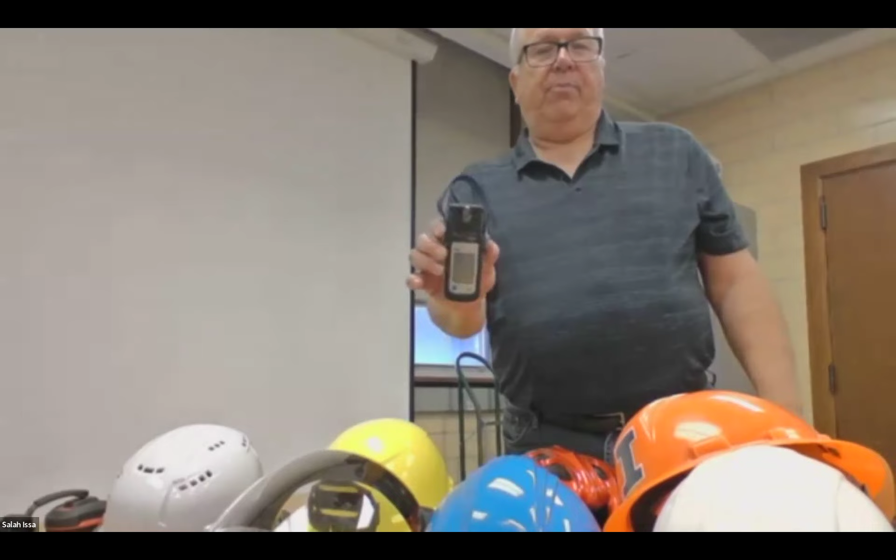Another thing that we would do as we're working in the world is we all carry devices with us. If I was in a situation or an environment where I had an oxygen issue or I need to monitor my conditions around me, I can carry a monitor. This is a replica 4-gas monitor. In certain situations in the ag world, you may actually have monitors specific to a product.

Like in the grain industry, if they've fumigated a bin or something and they've used phosphine or whatever, they would have a monitor specific to that product. Most fire departments and John Q. Public don't have that. It would be specific to the facility usually, but this monitors air, carbon monoxide, and lower levels, our LELs, for explosive. So once again, a simple, easy device.

Before they're used, you have to bump test them, which is basically you turn it on and let it cycle in clean air, and it does a self-test of all its monitoring, so that you have a working monitor for where you're at. Once again, critical to our safety.

If you were in a confined space situation, at least in the rescue world that I come from, there would be a monitor at the opening where you're going into the space. There would then be a second monitor on the rescuers themselves or the employees, monitoring where they're doing the work. And in my world, we record the readings on those monitors every 15 minutes, from the start of the entry to the end of the entry.

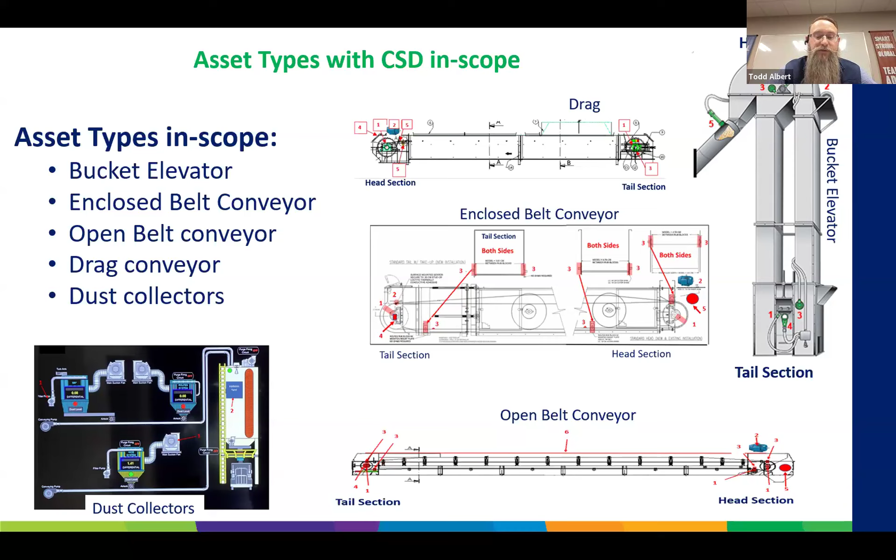Our goal is to highlight how consistent monitoring, inspection, and testing of these systems will help maintain safe, compliant, and efficient operations. Next slide, please.

All right, so bucket elevators. When it comes to bucket elevators, focus should extend beyond the belt itself. It's also essential to monitor all major pulleys, including the head, the boot, and if your bucket elevator does have one, a knee pulley. So to achieve coverage on these, install alignment sensors and bearing sensors at each of these locations.

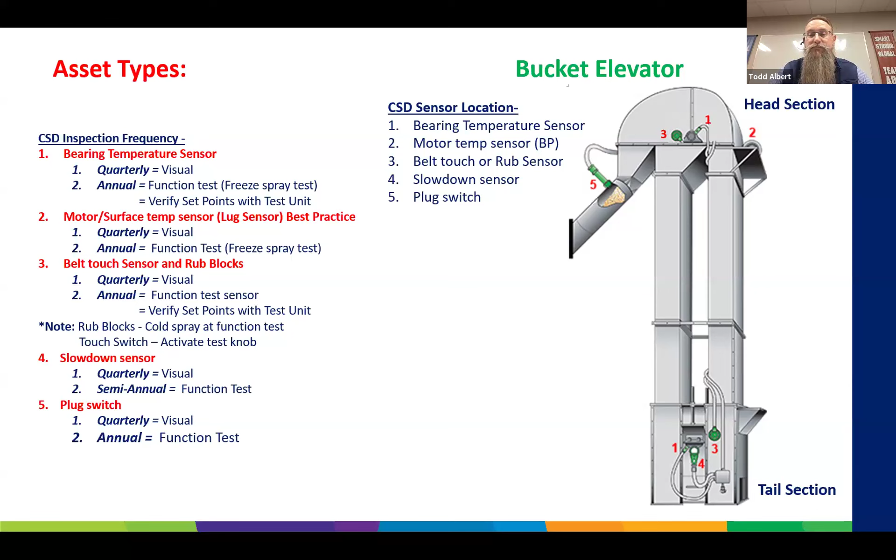And I will add this as well. If you have an alarm on one of your CSDs or your critical safety devices, make sure you go investigate why you had the alarm. Don't just immediately restart the equipment and try to keep restarting. Maintaining this inspection and testing routine helps ensure bucket elevators operate safely and efficiently throughout the year. Next slide, please.

Todd, I'm just going to ask a question here quick since we're there. Somebody asked about explosion sensors for bucket elevators. Just wanted to go back to that point. They're jumping ahead. Oh, yeah, okay. We'll get to that in a little bit. Yeah, we'll talk about explosions, suppression, and venting here in a second. So, yes, a good question.

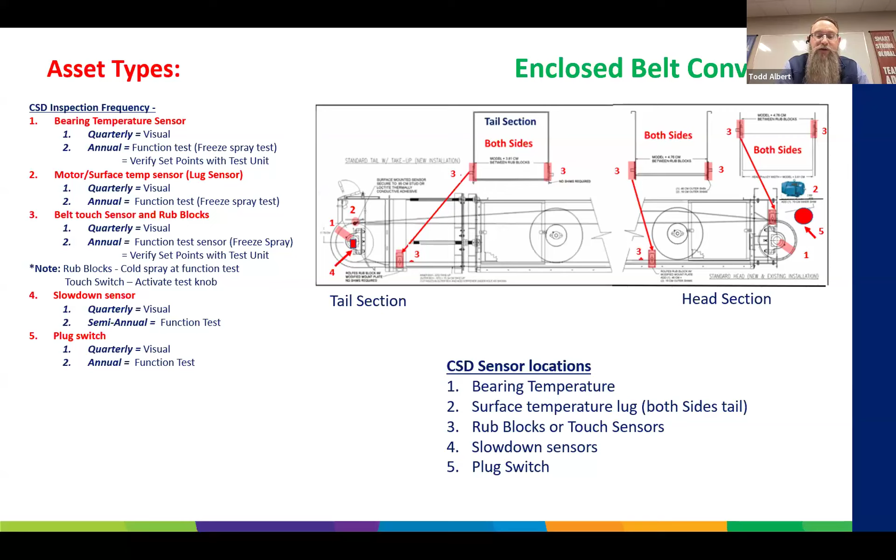Enclosed belt conveyors also utilize a similar sensor setup to that of bucket elevators, but in addition to your speed, your bearings, and your alignment sensors, it's also good to include lug sensors at the tail. Because a rub block or a touch switch alignment sensor can't be installed directly at the tail, they can be positioned farther up on the casing to pick up the belt. Since these alignment sensors can't cover the tail pulley, lug sensors can be added at the tail to detect any pulley movement or misalignment, providing an additional layer of protection and early warning capability. This diagram and this configuration allow for effective hazard monitoring. Next slide, please.

So open belt conveyors: in addition to all the sensors that we just talked about on enclosed belts, it's also important to install pull cords along the conveyor belt. The pull cord setup ensures that personnel have immediate access to an emergency stop from either side of the conveyor, enhancing overall safety and compliance with best practices for conveyor hazard monitoring. Next.

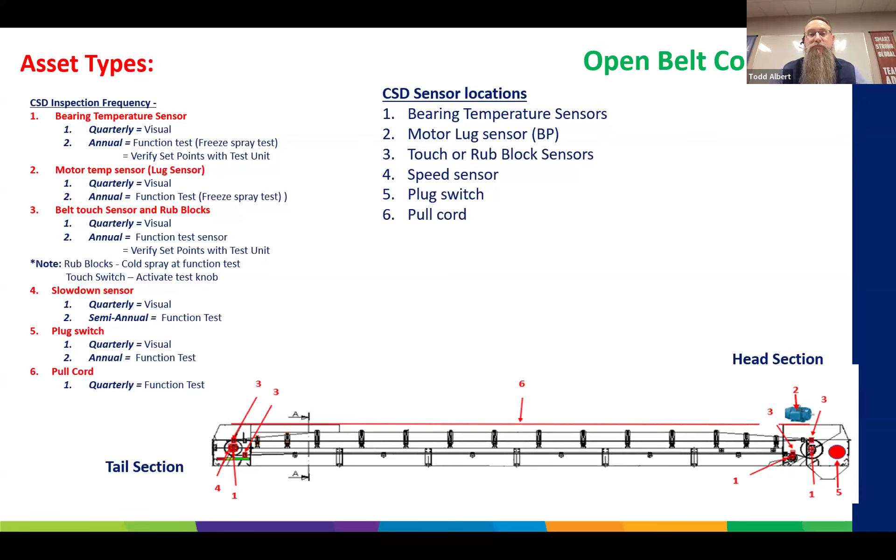Drag conveyors: I would say the most important sensor on here is a slack chain switch. If you cannot install a slack chain switch due to design, a speed sensor or a lid switch can also effectively work in this system.

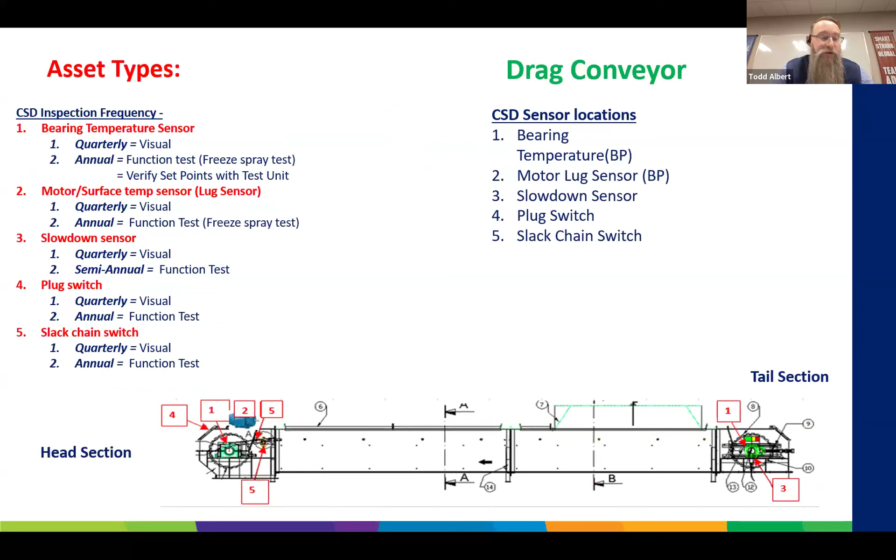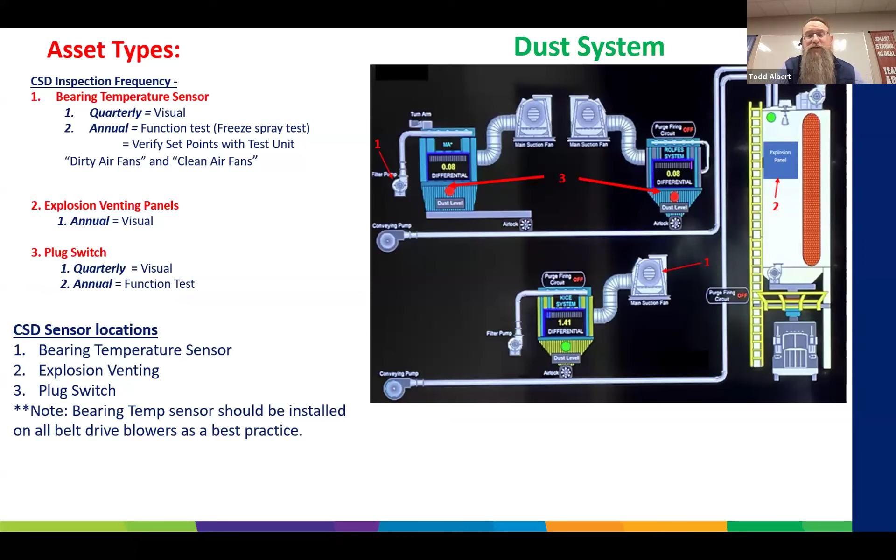Next slide, please. All right, dust systems. The CSDs we're looking at there are bearing sensors on the fans, plug sensors, and explosion venting or suppression. If you have a dirty air fan, which is the fan before the dust filter, I would recommend you have bearing sensors on that fan. If you have a clean air fan, I would say having bearing sensors on the fan bearings is more of a best practice. All right, next.

Okay, so let's turn our attention to the sensors themselves. If you're unfamiliar with the various types of sensors used in the monitoring systems, I've outlined them below for reference. And they did bring up the question about explosion suppression and venting. I did take that out of here, I'm sorry. We can talk offline about that if you want. But I'll go through these.

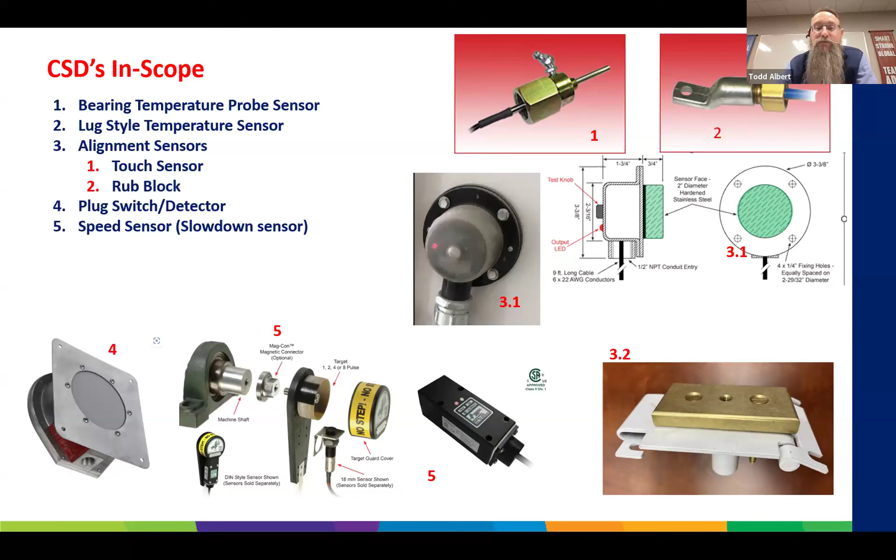The first picture we have is a bearing temperature probe style sensor. Number 2 is a lug style temperature sensor. 3, we have different types of alignment sensors. 3.1 is a touch switch or a touch sensor. And then 3.2 is a brass rub block. 4 is a plug sensor, and that one in the picture is a diaphragm style plug sensor. And then 5, we have a speed sensor or a slow down sensor. Next slide.

All right, bearing temperature sensors. They're designed to detect or monitor heat within the bearing. In the bottom left picture, you'll see what I call a button style bearing temperature sensor. Technology has since resulted in additional options. For example, on the far right, you have an adjustable depth probe sensor. I believe that receives a faster reaction time on temperature increase. It's closer to the bearing race.

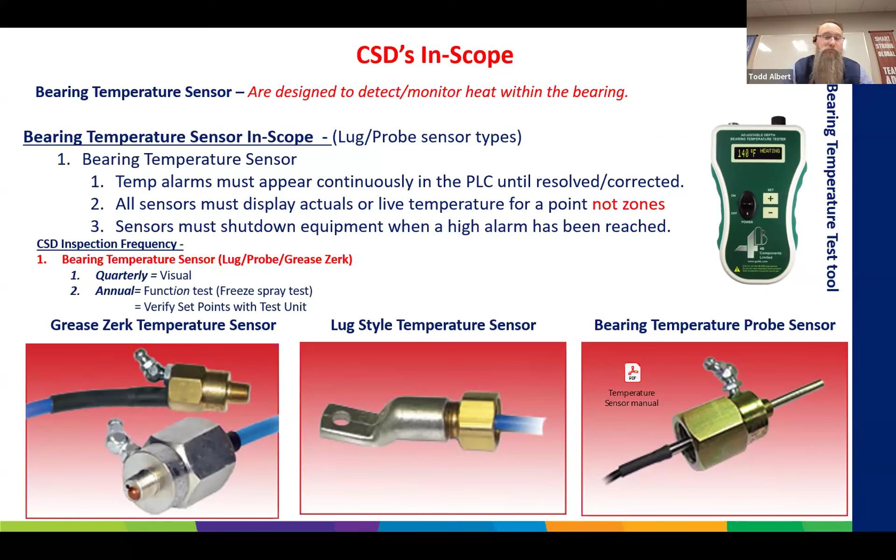And then in the middle, you have a lug style temperature sensor. This is an older picture of a lug sensor, but some newer ones have adjustable depth probes that actually go in that lug sensor, and I feel that's a great advancement in this. All right, next slide.

So, quarterly visual inspection of bearing temperature and lug sensors. Are bearing temperature sensors properly mounted to a bearing or surface? Are the temperature sensors easily accessed for periodic inspection? I can't say this enough. If you have, let's say, a tail of a high roller, or a head of a bucket elevator that's way out in the middle of nowhere, and you have to get out there using a harness, it's not safe. Let's get some type of platform or scaffolding so we keep our people safe out there.

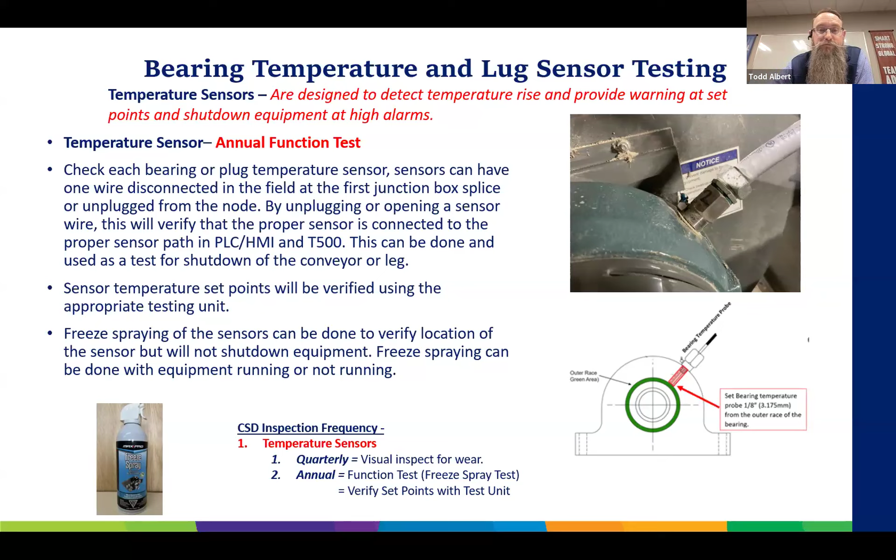Next picture, please. All right, click it one more time. There you go.

So I'm going to show you a couple pictures of acceptable and unacceptable. On the right, you see acceptable. If you stare at a picture long enough, we might find something wrong. But the way that bearing sensor is installed looks secure. From the picture, it looks like seal tight's good. Looks like everything's fitted in there good. Looks nice.

Unacceptable. On that top picture on the left, fitting not secure on the grease. So if you look at that, that's where I talked about if you didn't tighten down that fitting on the bearing sensor, you could get grease sent back up through your seal tight into either your field connection boxes or junction boxes, makes a mess. So you don't want that. Make sure it's tight.

And then on the bottom, unacceptable picture, seal tight not connected. So you could get water into the seal tight, water into that bearing housing. You can get dust in there, and that's all stuff you don't want in your bearing. And then also we potentially could have that probe not set at the correct depth. So stuff to look for on your visual inspections as well.

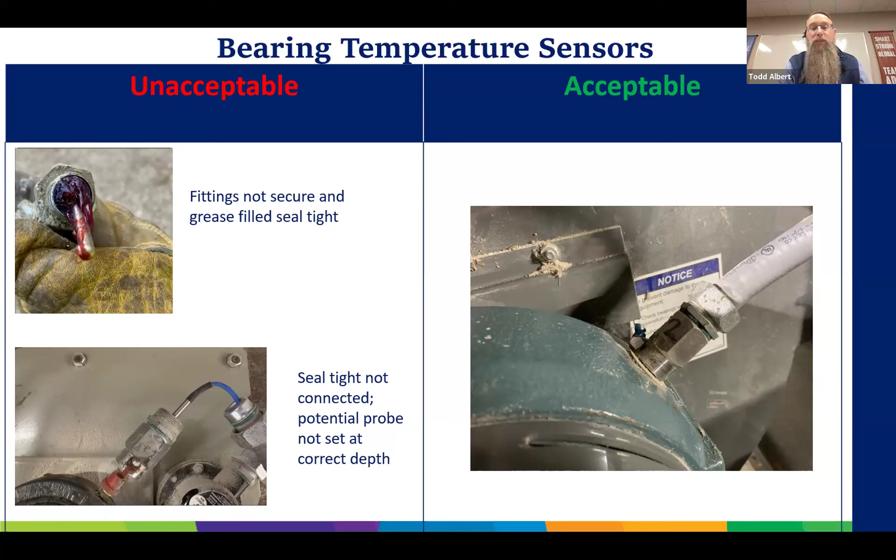All right, next slide, please. All right, getting into alignment sensors, touch sensors. Touch sensors are designed to detect misalignment of the belt or pulley, which activates a shutdown after 15 seconds of continuous contact. Quarterly inspection on this. Are alignment sensors properly mounted to pick up belt and pulley shift? Are they easily accessed? Do they show signs of wear or frequent contact with the belt?

So I'm going to ask, when you do inspections of these touch sensors, that you do lock out that piece of equipment. Just like Dave said earlier today, lock that out. I don't feel it's safe that you keep that piece of equipment running or have product on it and you pull an alignment sensor out to inspect it. There's potential for someone to get hurt or get injured. We don't want that. So make sure everything's locked out.

The alignment sensor shows signs of wear or frequent contact. So this touch sensor, I don't know if you can see it here. This one has a little bit of a groove on it right there. That's got a groove on there. I would look at replacing this. Well, this one, it's also missing the knob on the back. Yeah, if you see that on a touch sensor, I'd replace that.

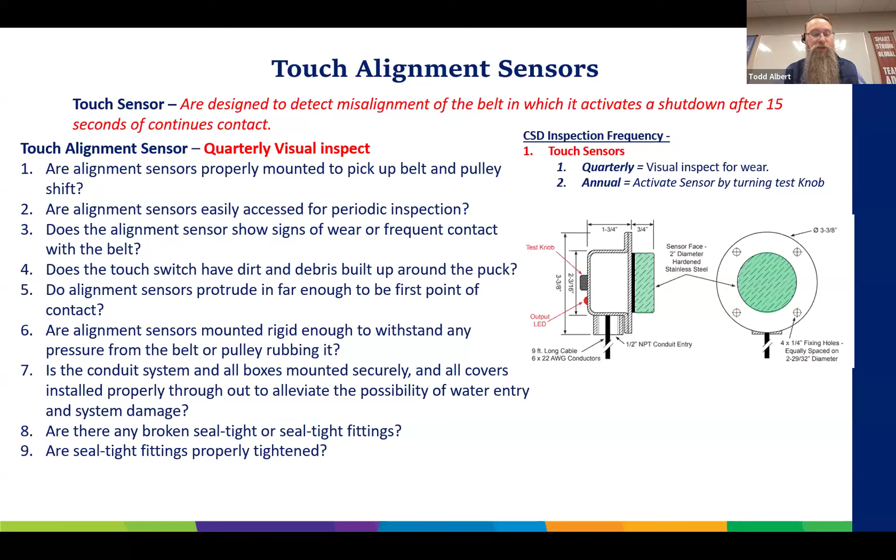We want to make sure that's first point of contact, and I'll talk about that in a minute. We want to make sure it's rigid enough to withstand pressure from that belt or pulley coming over. We want to make sure all that conduit and all covers are sealed up, making sure we don't get water in the system again. And again, seal tight fittings, making sure they're properly tightened and nothing's broken on there. Next slide, please.

All right, testing the touch sensor. Easy way to test this. Again, the knob is missing on this. It's hard to see. There should be a knob there, and there is a little red light. Of course, this one's not hooked up anymore. So to test this, you would not have product on your equipment, but you'd have that piece of equipment running. You'll see that little red light on there.

You would turn that knob until you see the red light go off. Once that red light goes off, it initiates your alarm or your shutdown. And once that's done, you can turn that knob until you see that little red light turn back on, and then you're good to go. You can move on to the next sensor. Next slide, please.

All right, so again, we got some acceptable pictures and unacceptable. Here in this picture, you can see on the acceptable side a touch sensor that looks to be acceptable. One thing to keep in mind is the length of the self-tapping screws that are in there. They need to be shorter than the puck. And here is an unacceptable. If you look on that unacceptable side on the right of the picture, there are 5 shims in that puck and loosened bolts on that.

Rule of thumb is if you have more than 3 shims on your touch sensor sticking it out, you are most likely not the first point of contact. When I say the first point of contact, I mean if the belt or pulley misaligns, will that sensor be the first thing that belt or pulley touches? You don't want the belt or pulley to touch anything else first.

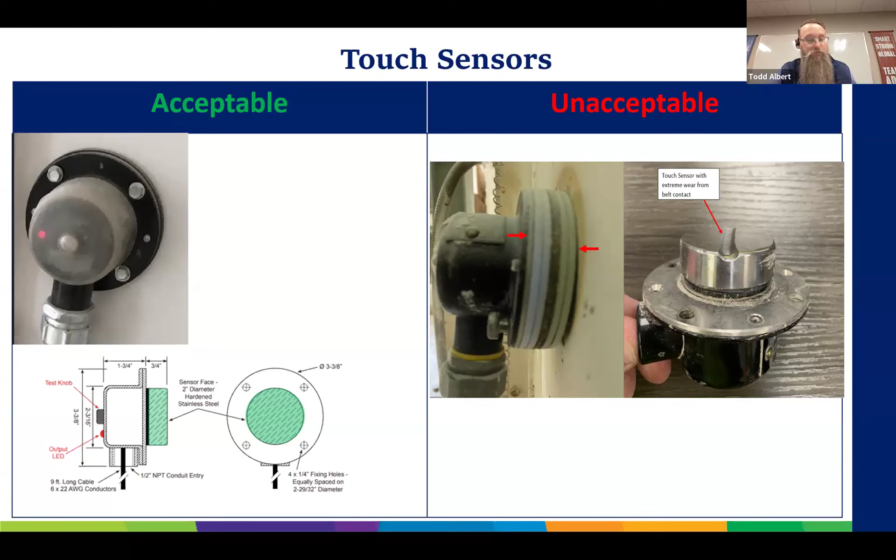All right, rub blocks. Rub blocks are designed to detect misalignment from the belt or pulley by temperature. So quarterly visual inspection: are alignment sensors, your rub blocks, mounted properly to pick up belt and pulley shift? Are alignment sensors easily accessed? Again, we don't want to have somebody climbing out on something and making them unsafe. We want an actual structure or a platform they can work off of.

Do the alignment sensors show signs of wear from frequent contact with the belt? Again, just like Dave said earlier today, lock that piece of equipment out before you start pulling these rub blocks out and looking at them. We don't want you to have a potential to be injured with that.

So when you look at that, if you see wear, you can see this rub block has been rotated once you've had a little bit of a wear mark here. Once they've had either the alarm or they did a quarterly visual inspection, they rotated it and used the other side, and then this side has a very deep groove. Once it's got that deep of a groove, replace the rub block.

Some rub blocks, you can flip them, but I would recommend you not to flip them, because if you have that big of a groove back there and you flipped it, you could get dirt and debris built up behind there. And if you did have a hard belt or pulley rub, then you could potentially have grain dust behind there. And then that grain dust could be your first smolder point there. And we don't want that. So rotate them, but do not flip them.

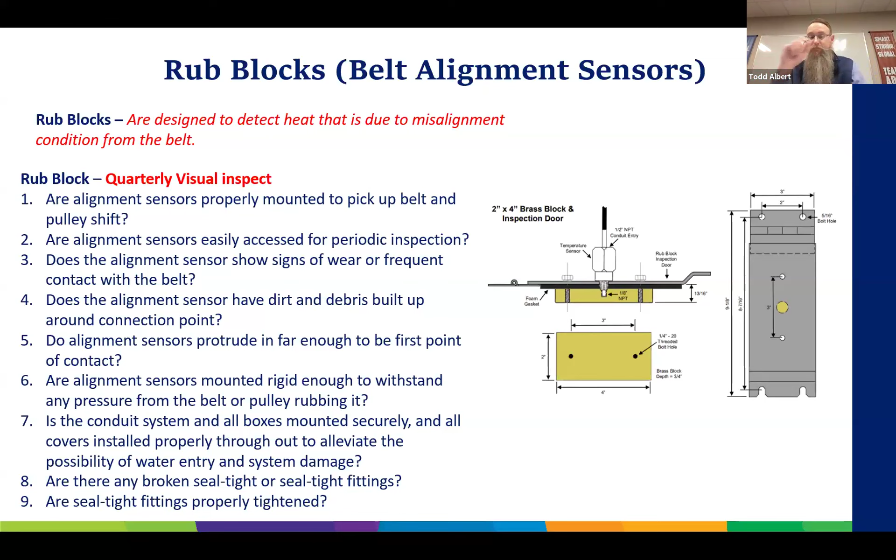So yeah, and then the rest of it's just like all the other slides, making sure they're rigid enough, making sure you're sealed tight and all your connections are tight and nothing's open or broken. We can go to the next slide now.

Annual test of a rub block. Again, we're going to keep this easy. If you have 4B, they have an ADB tester. If you have CMC or AGI, use their Easy Tester. If you have ElectroSensors or Hazard Pro, use their Insight tool. Great tools. And if you don't have a system that can use one of these, use your freeze spray.

Again, do not go out there with a torch or a heat gun and do this. We're messing with grain dust here. We don't want anything to smolder or catch fire or create an event. Let's keep you guys safe. All right, next slide, please.

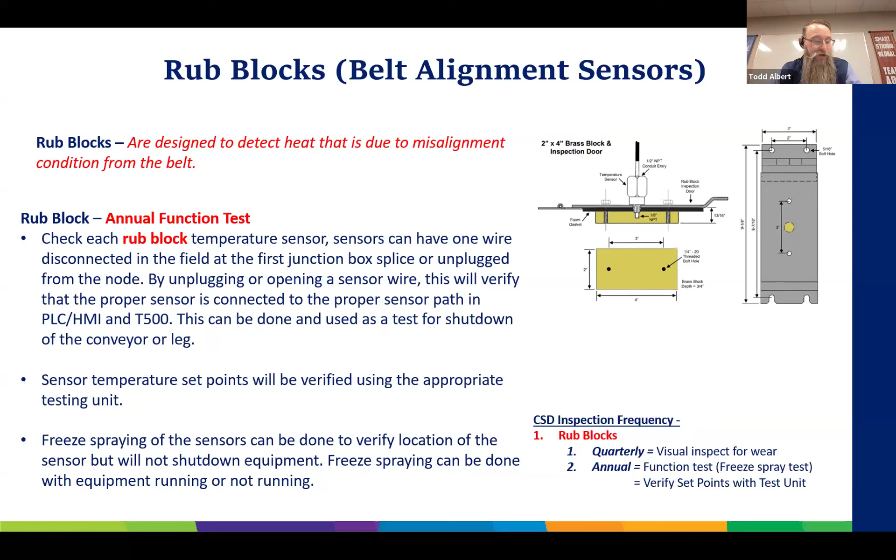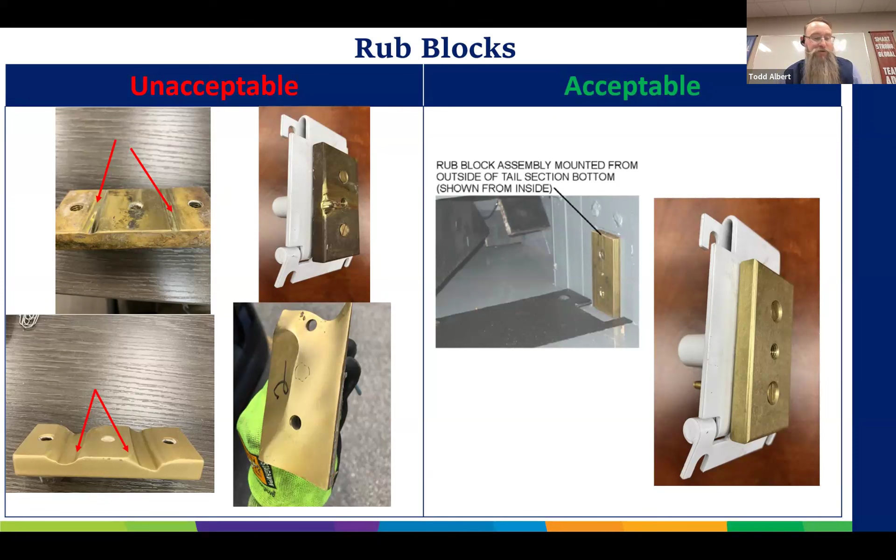Acceptable side, both of these pictures show a new rub block there. No wearing on it, no grooves. And the top left picture of acceptable looks like it's in a new belt conveyor, new high roller. Looks to be the first point of contact from here. Looks like a good install. Next slide.

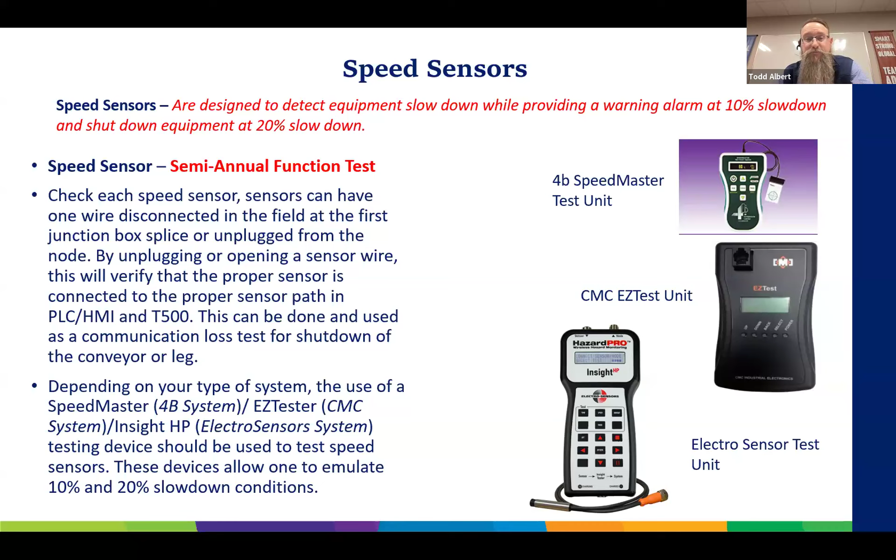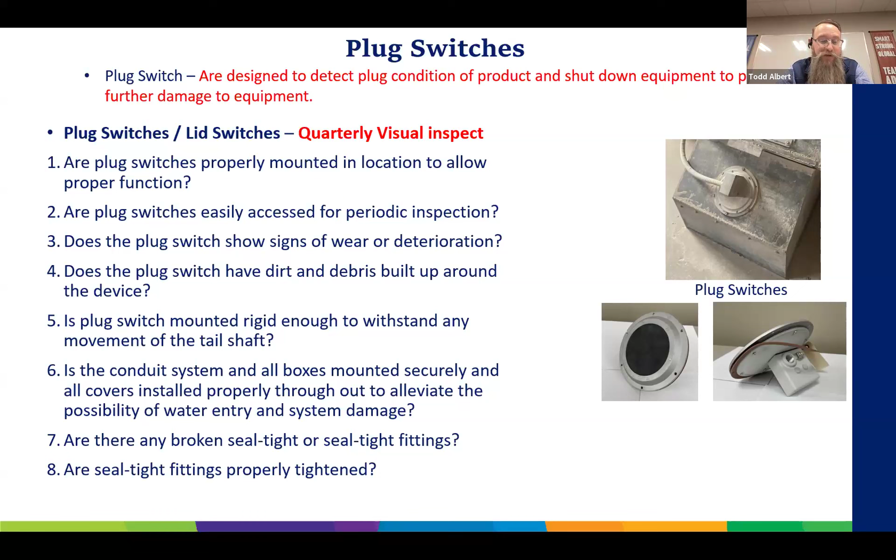Plug switches. Plug switches are designed to detect a plug condition of product and prevent damage to equipment. So biggest takeaway on a plug switch visual inspection, making sure they're easily accessible. Most plug switches on bucket elevators tend to be on chutes in way far out of the way areas. If it's not easily accessed, let's make sure we have some type of a platform or scaffolding that we can get to them. We don't want anybody climbing out there to just visually inspect it. Let's make sure they're safe. Next slide.

All right. Annual inspection of a plug sensor. Here in this picture on the bottom right, we have a diaphragm style plug sensor. The best way to do that is remove the inside screws. It's hard to see in this picture, there'll be outside screws, and then there's going to be inside screws. Those outside screws hold down a boot or a cover over that chute or the spout, and the inside screws just hold in the actual diaphragm switch.

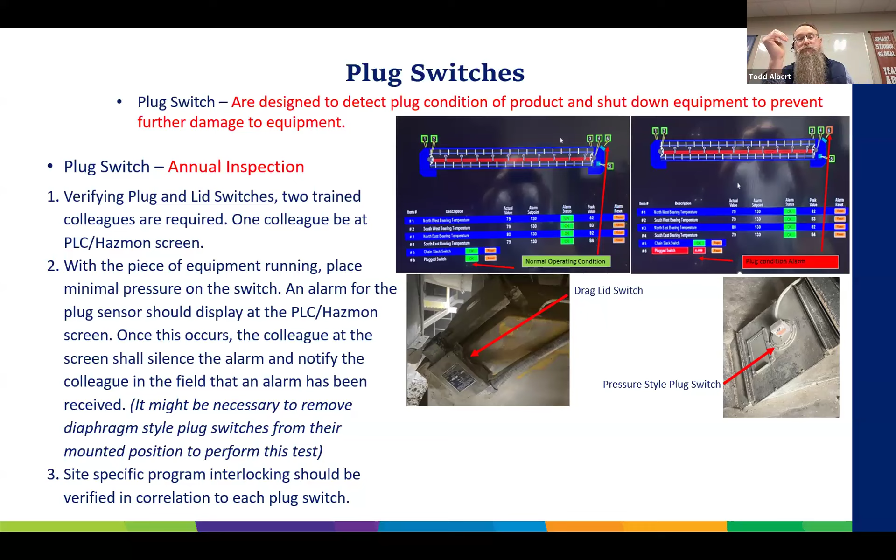So remove the inside screws, and then once you have that, just depress it, and it's basically just a limit switch in there, or type of switch. Once that activates, it should be an immediate shutdown. All right, next slide.

Okay, so I know I've run through a 1,000-foot view of many different slides, but there'll be time for questions, and if not, we can talk afterwards. But routine testing like this ensures that each component of the HAZMON or CSDs are functioning as intended. Verifying proper sensor response not only confirms system reliability, but also helps identify potential issues before they lead to safety risks or unplanned downtime.

So to wrap it up, HAZMON systems or CSDs are your last line of defense to prevent potential catastrophic events. By implementing HAZMON systems, you will significantly reduce the potential for human error and ensure a safer, more reliable operation. While these CSDs and HAZMON systems serve as the last line of defense, the biggest key here is proper maintenance remains essential to preventing these issues.